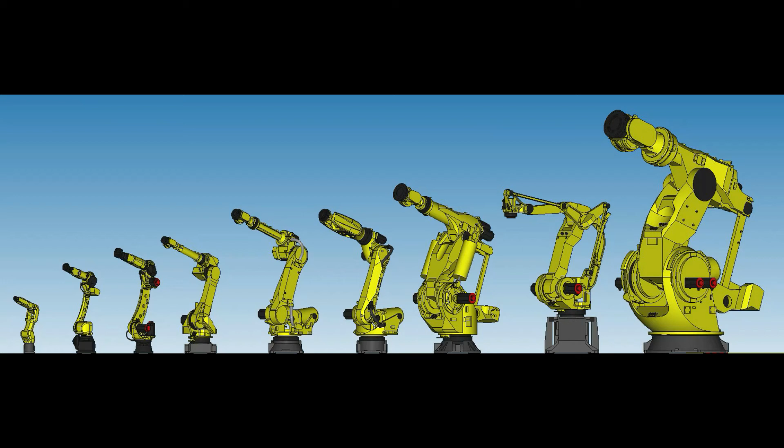This tutorial is an example of DCS setup for robots sharing a zone. Please follow the setup; you may need to pause the video to get the info.

Choose all DCS options except Safety PMC. Click Next button until you finish the wizard.

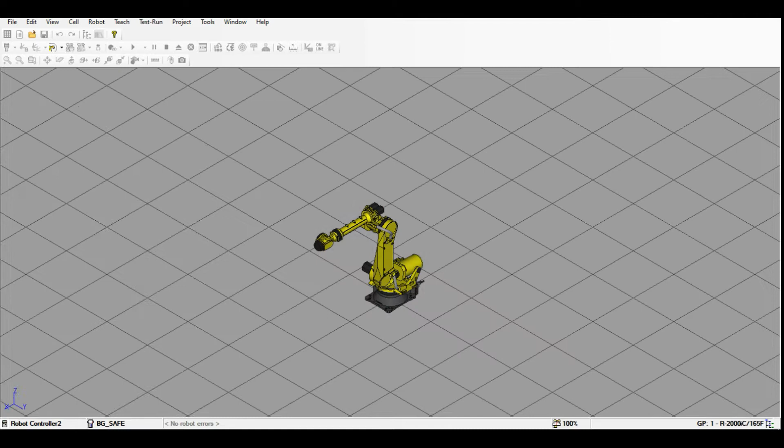Make the cell floor invisible and then use an obstacle box to create the new floor.

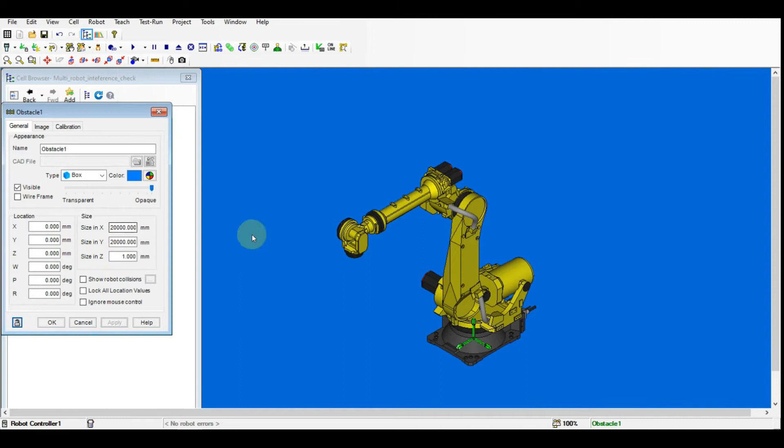Open robot properties and change the Z height. Add robot base with right-click at the Robot tab from the Cell menu, and then select Dressout.

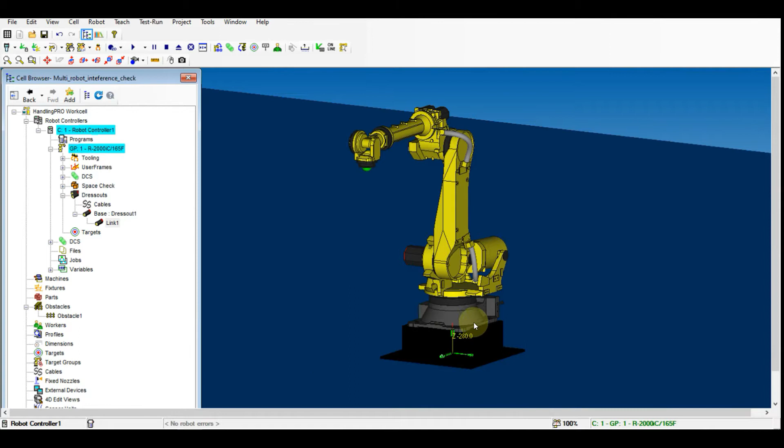Change the robot Y location to free up space for the second robot. Add gripper CAD to tool number 1 using the Roboguide CAD library.

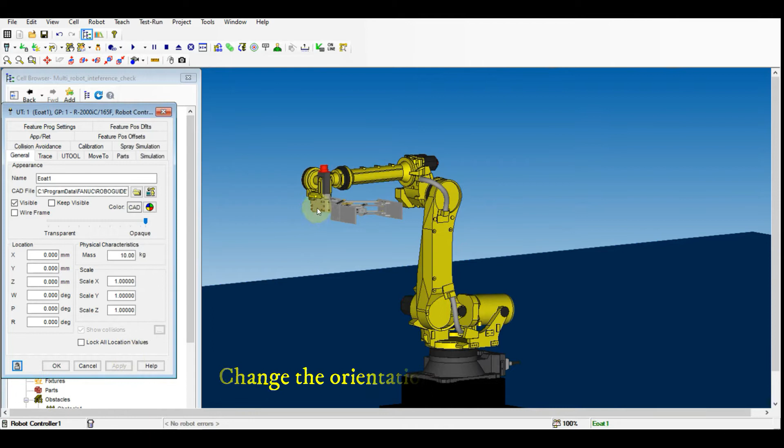Change the orientation of the gripper CAD. Remember to change the user tool coordinates.

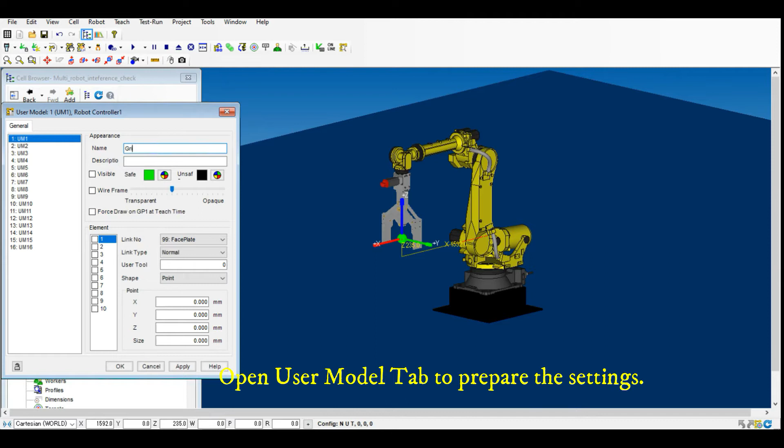Open the User Model tab to prepare the settings. Open DCS User Tool Frame to register the user tool for DCS.

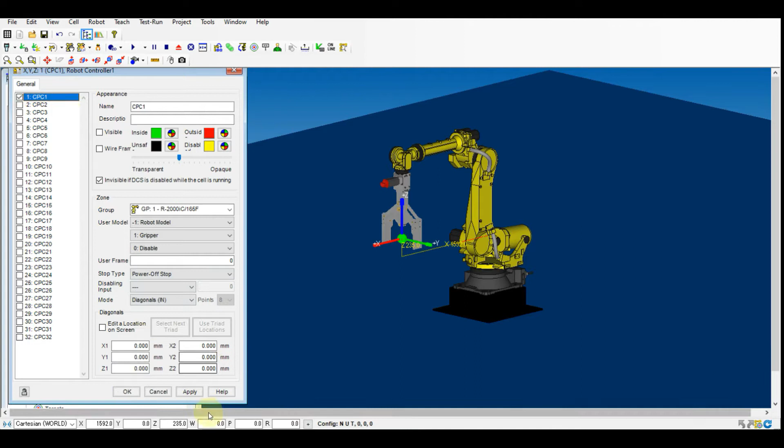Open DCS XYZ and do the settings as following. We need to assign the user model at one of the active Cartesian position checks to visualize the user model space.

Now back to the user model settings window. Set the zone accordingly.

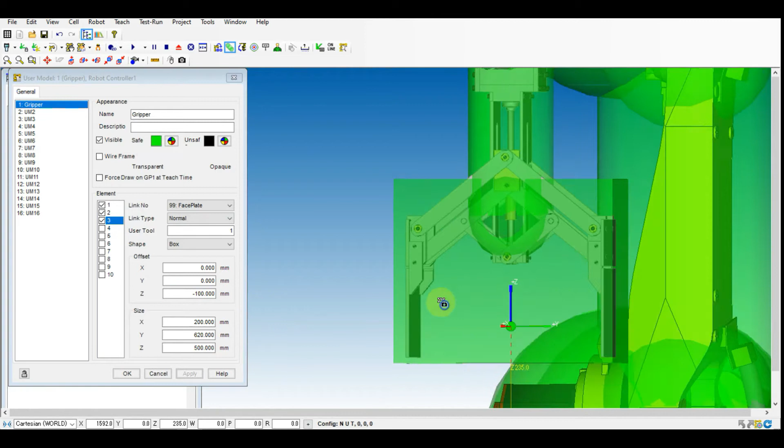Duplicate the robot now: right-click at the Robot Controller tab and add a robot with clone mode. Simply set the coordinate; we can still change it later.

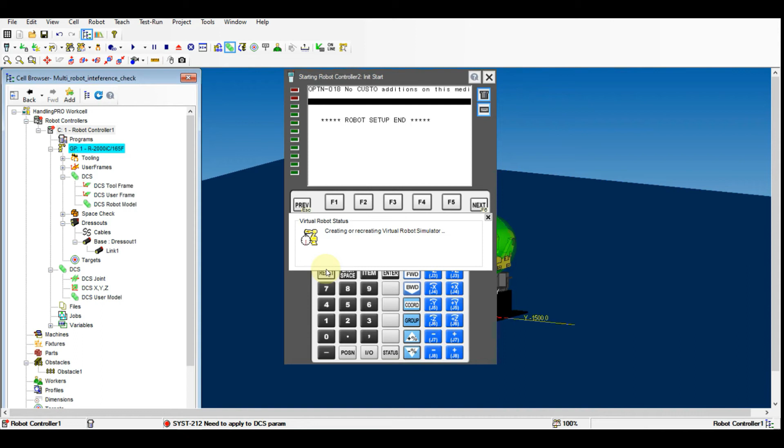Change the robot position now. Add a fixture like the sharing work zone of both robots.

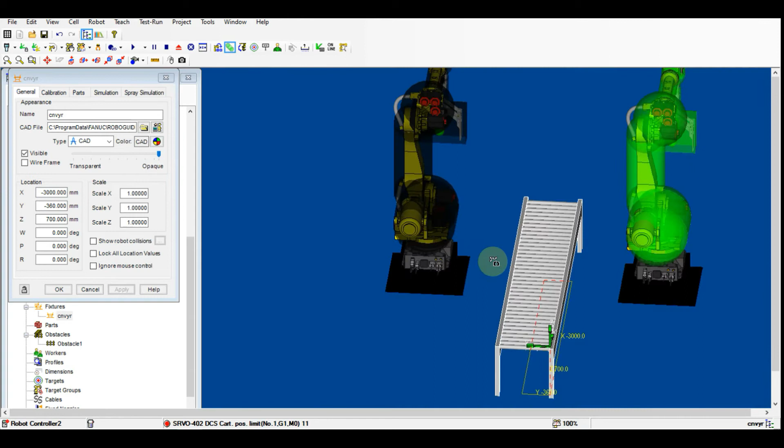If you want to put the conveyor in the center of both robots, measure the distance from the robot to the conveyor.

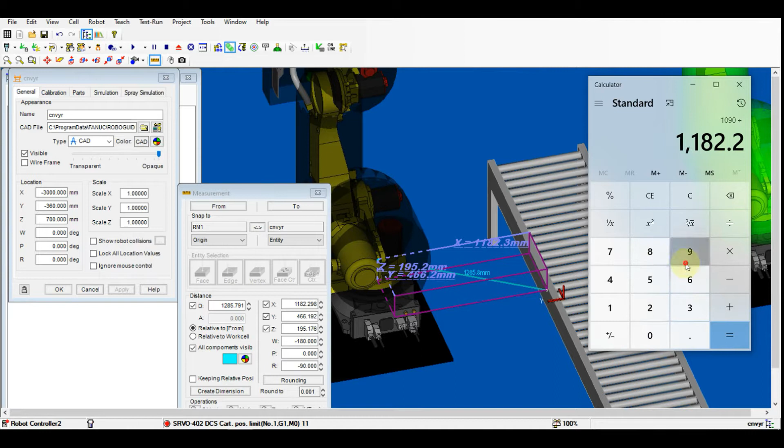Change the distance from the robot to the conveyor after calculating it, then reconfirm the position of robot to conveyor.

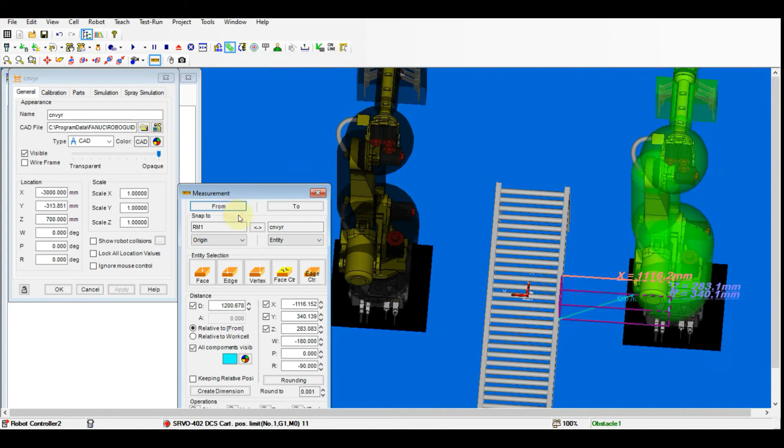Now open the setting window of DCS XYZ, and start setting up the safety zone of the robot.

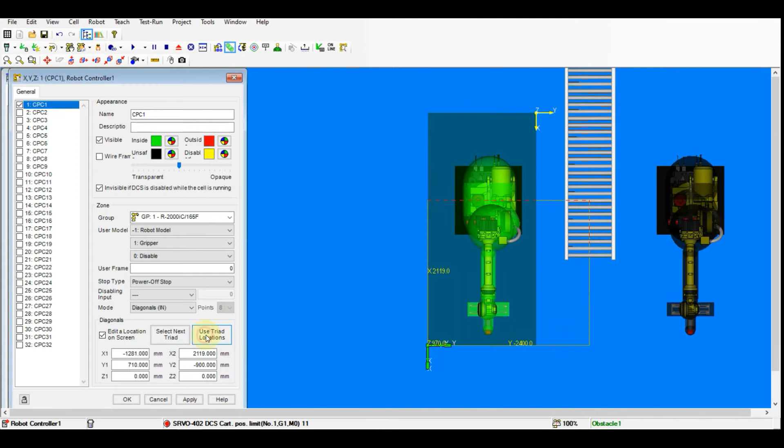Use edit location on screen, it makes the setup easy. Please make sure you click use triad locations before you click the next triad.

Round off the location value after that, and change the name for this zone.

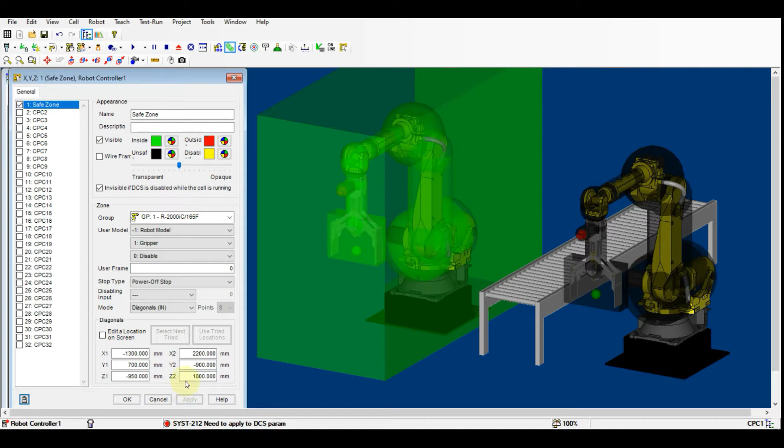Now it's turn to set robot 2. Apply the same setting as robot 1 and change only the location of the triad.

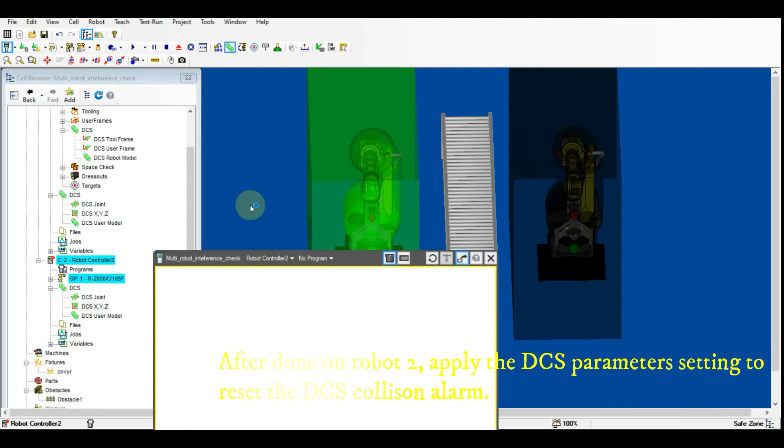After done on robot 2, apply the DCS parameters setting to reset the DCS collision alarm. Do the same thing to robot 1.

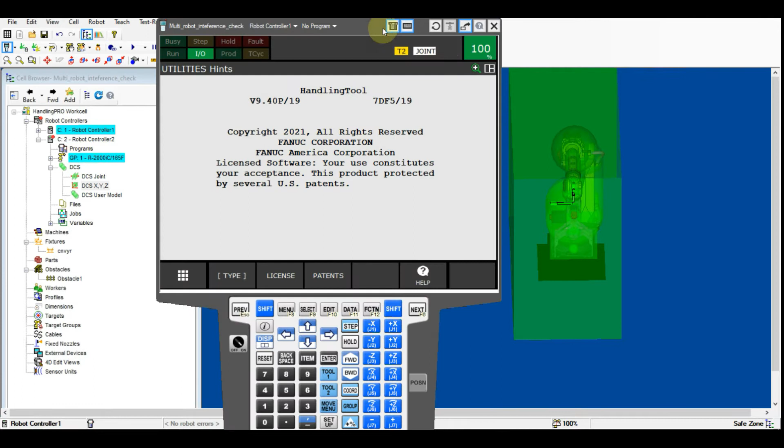Set up a working zone to prevent the robot from moving out to the another robot that stays in the safe zone.

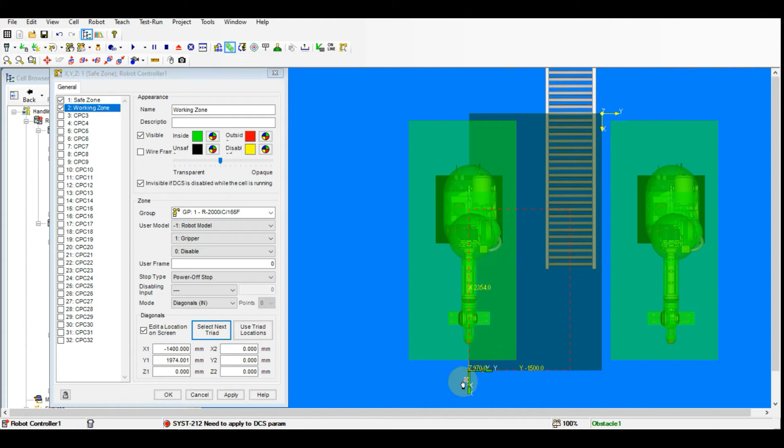Do the same setting on another robot 2.

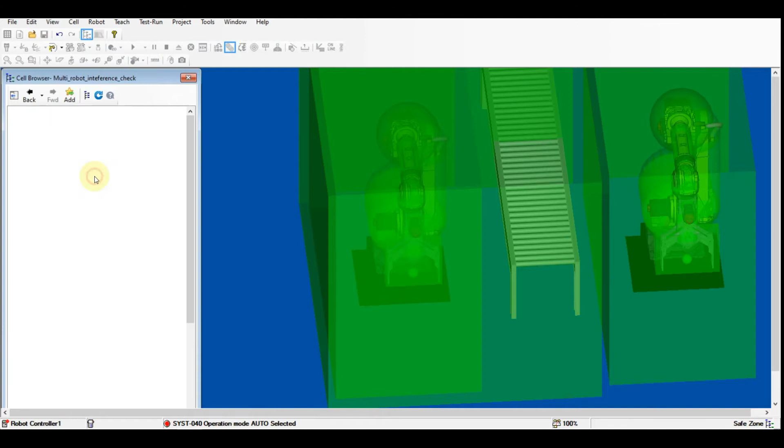Set up a restrict zone to prevent the robot from crashing into the conveyor.

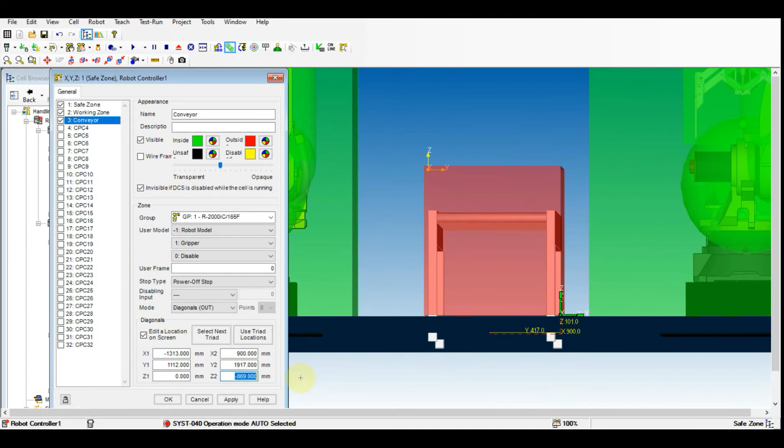Do the same setting to another robot.

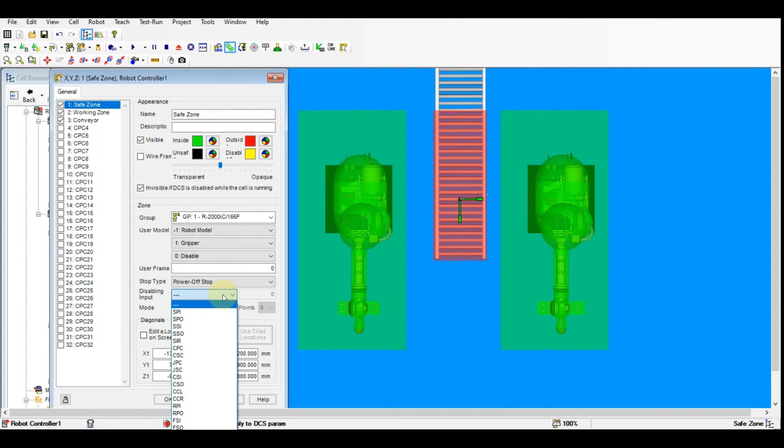Now we can set up the disabling input for the safe zone, using SIR, Safety Internal Relay, as the disabling input.

Turn on the Teach Pendant, and then open the DCS IO Connect screen.

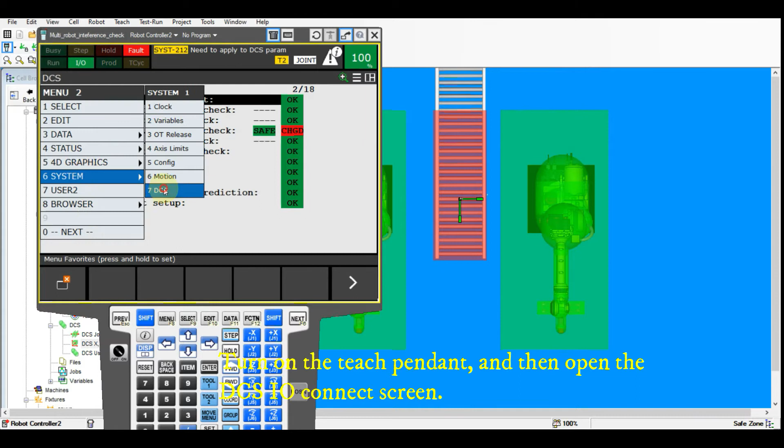Set up SIR1 to NSI1. Apply the setting and cycle power the controller.

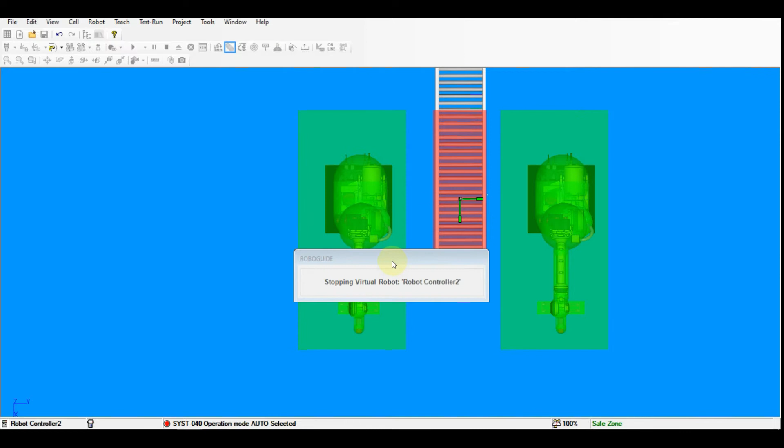Apply the same settings to another robot.

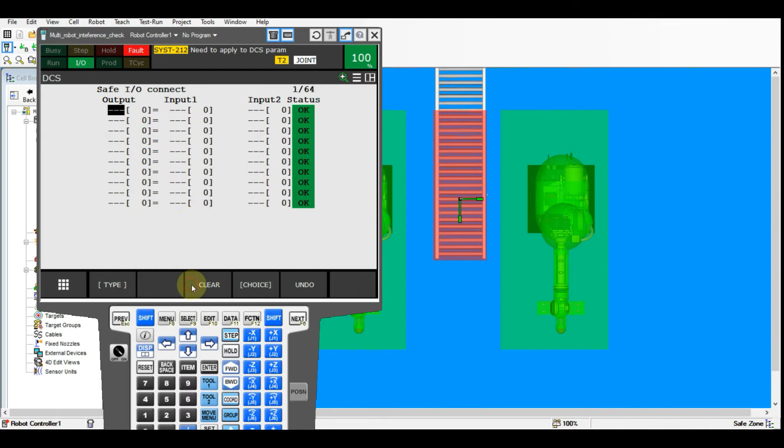Now, redo the I/O configuration of digital input and output.

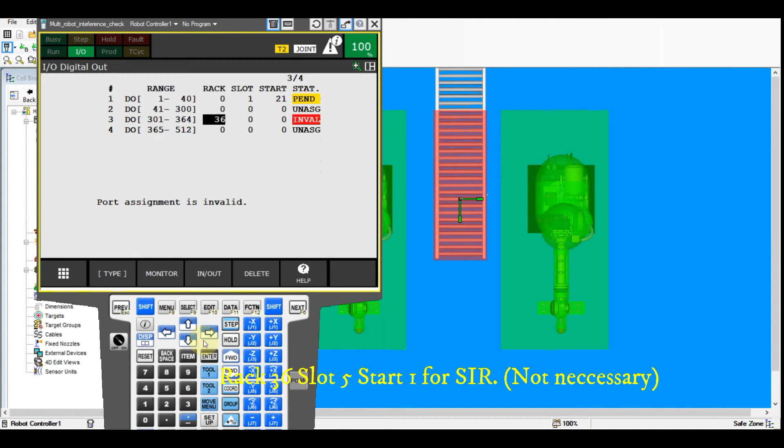Rack 36 slot 5 start 1 for SIR. You are not necessary to set this.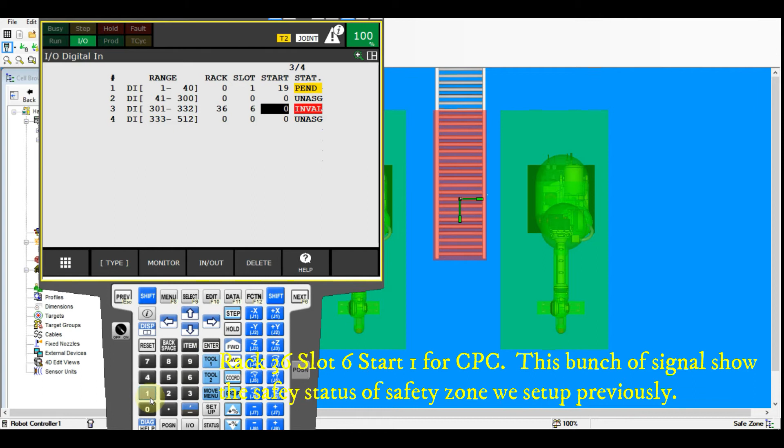Rack 36 slot 6 start 1 for CPC. This bunch of signals shows the safety status of the safety zone we set up previously.

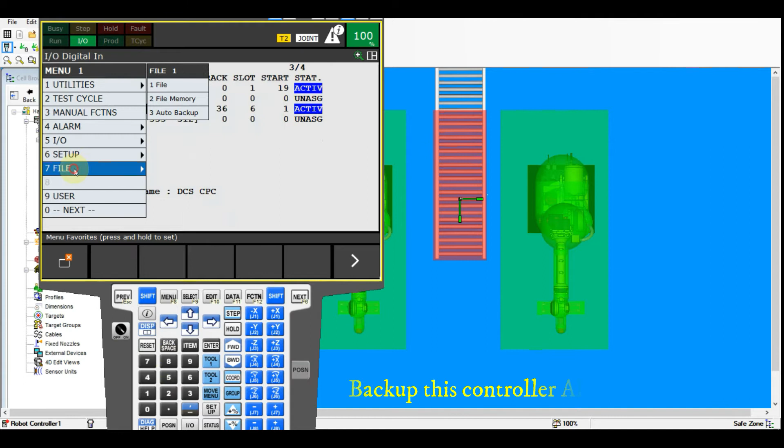Back up this controller, all of the above files. Open the work cell file, and look for the robot that was backed up just now.

Find and copy the file DIOCFGSV.IO. Then open Robot 2 file and paste it in UD1.

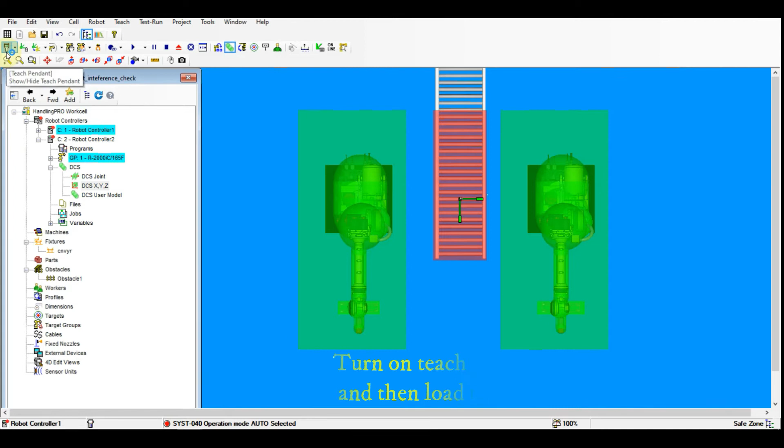Turn on the Teach Pendant of Robot 2 and then load the file from UD1.

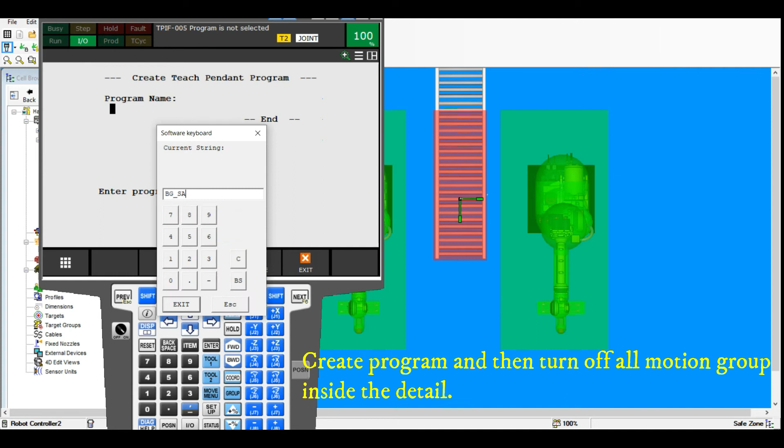Create a program and then turn off all motion groups inside the detail. Insert the program like above.

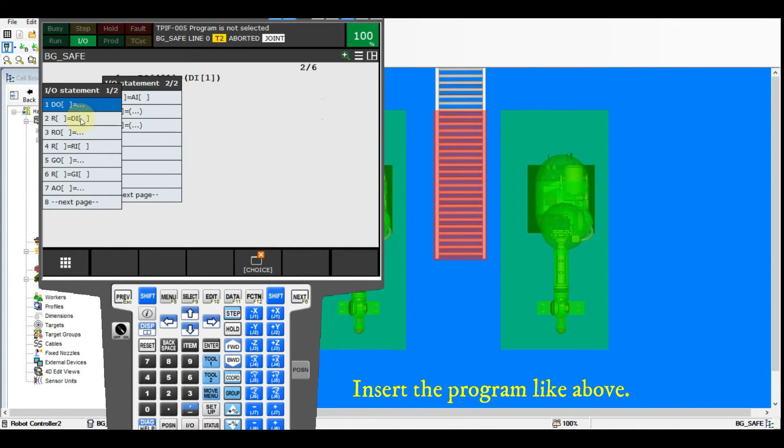Key in the name for the program-related I/O.

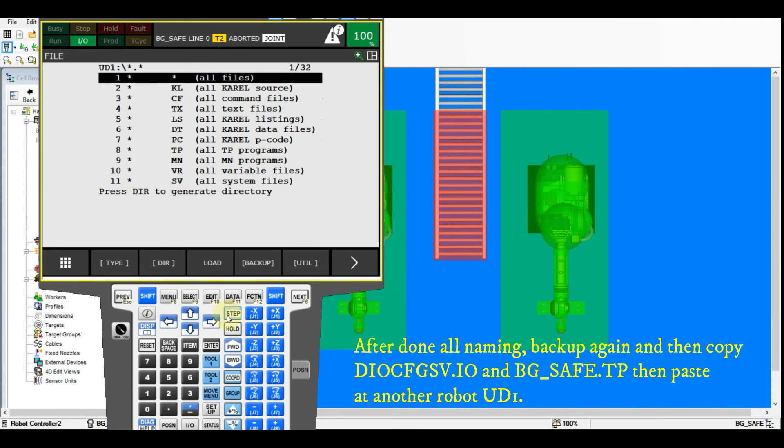After naming everything, back up again and then copy DIOCFGSV.IO and BG_SAFE.TP, then paste them at another robot's UD1.

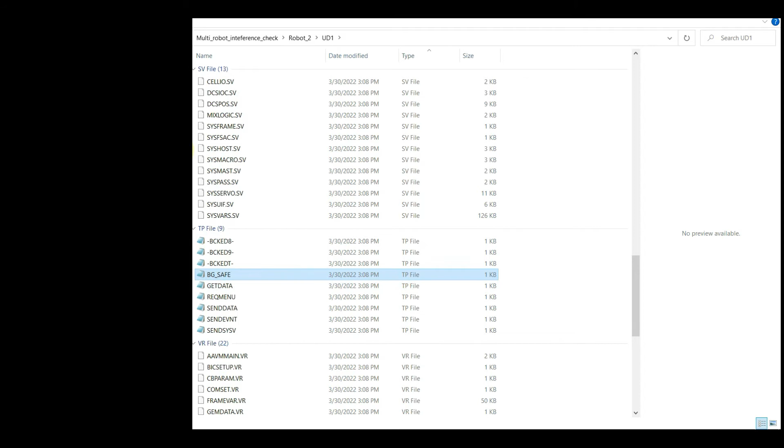Turn on the Teach Pendant and load the new files.

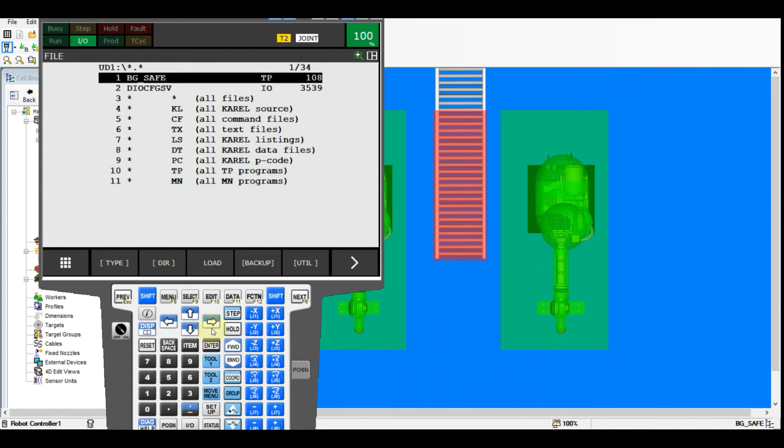After loading the files, press menu, go to Setup and then go to BG Logic. Choose the BG_safe program and run the program.

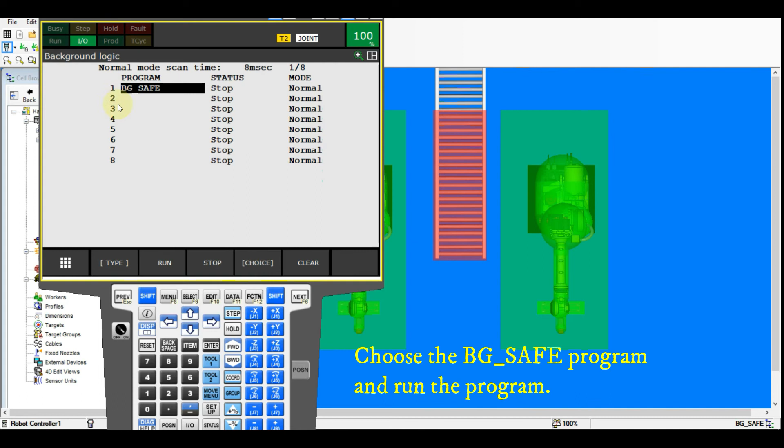Restart the controller due to the loaded DIOCFGSV.IO. Change to another controller to assign the BG_safe program.

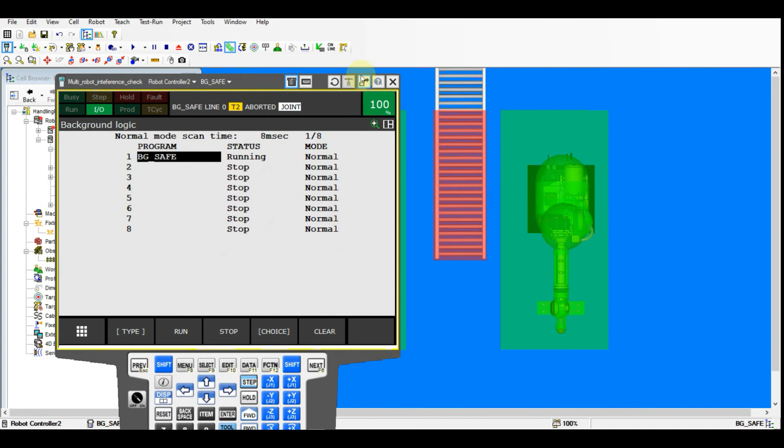Use the Tool menu from the top menu bar and then open the external I/O connection. Set up accordingly.

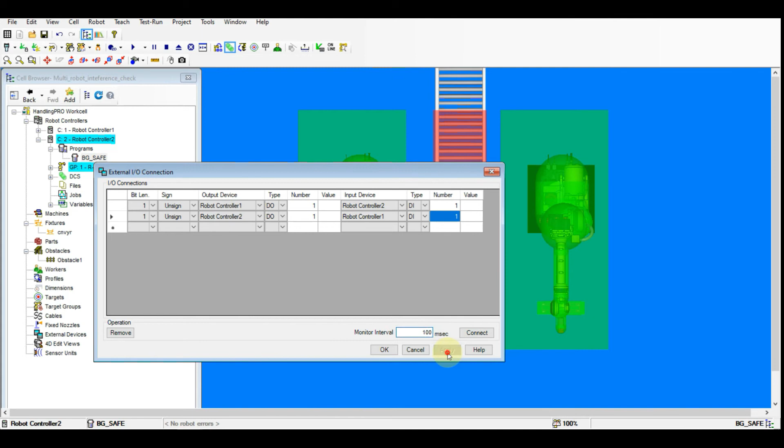Use the Tool menu from the top menu bar and then open the I/O panel utility. Set controller 1 and 2 with DI1 and DO1.

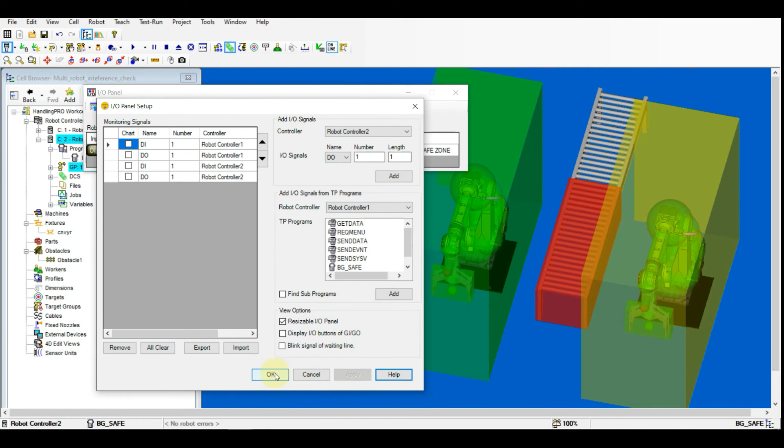We can change the I/O name from the panel directly.

Now try to move the robot that has the disabled zone. Switch to another and try to move.

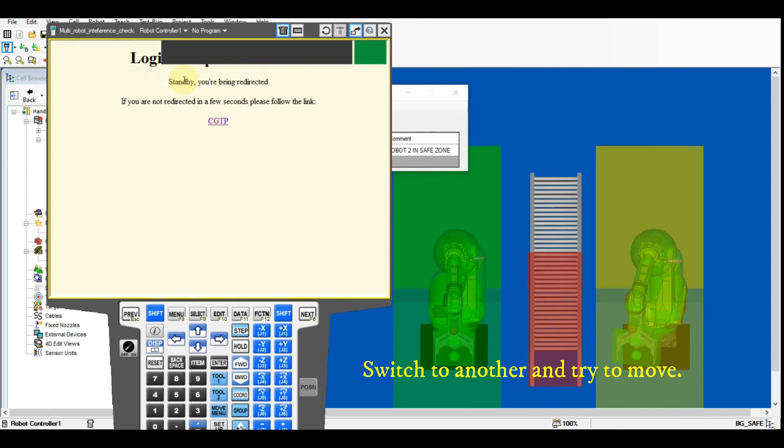Robot 1 has contacted the zone and stopped. Then only the zone turns to disable. This condition was not correct.

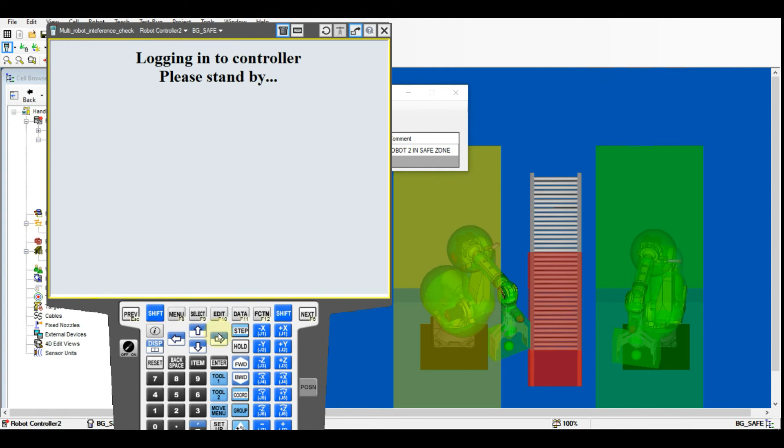We can correct it as follows. Open the DCS XYZ settings window, and add one more zone.

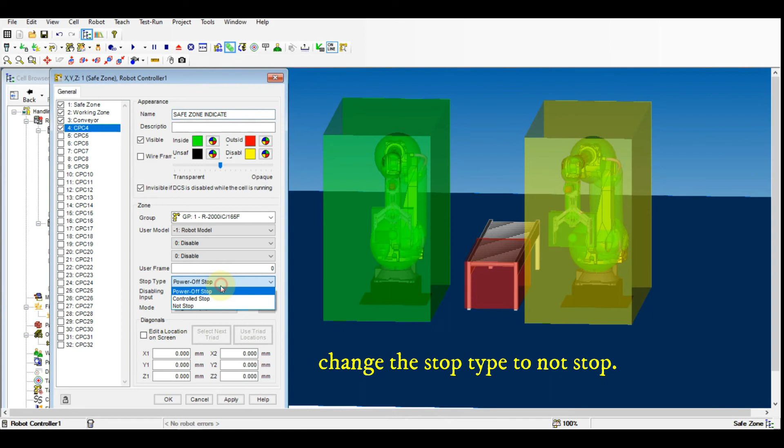Change the stop type to not stop. Set the same zone location as the safe zone.

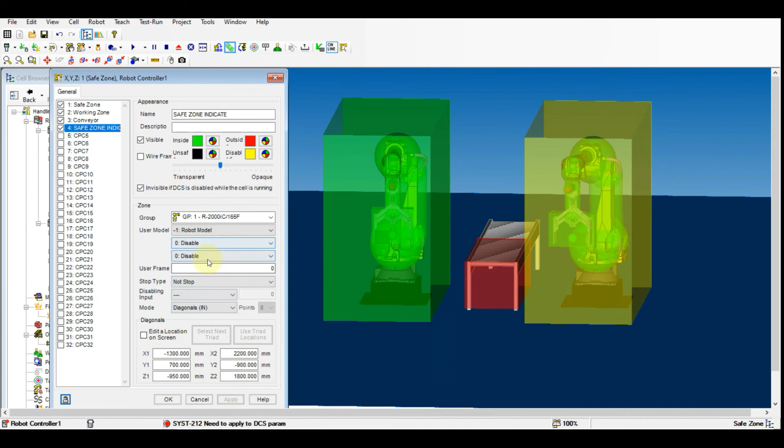Set the new zone for Robot 2 too.

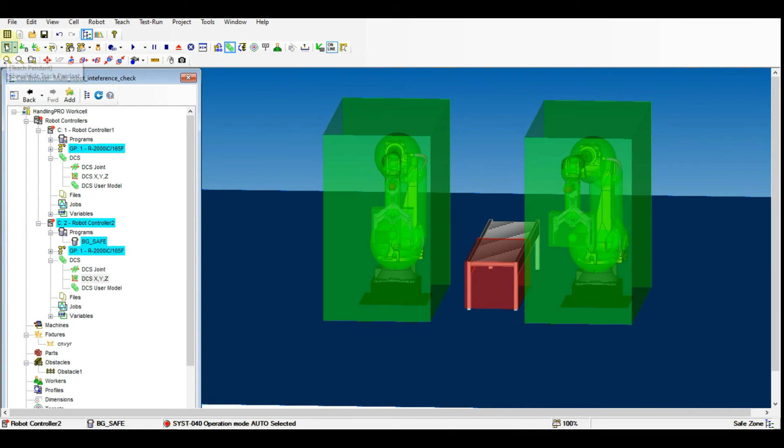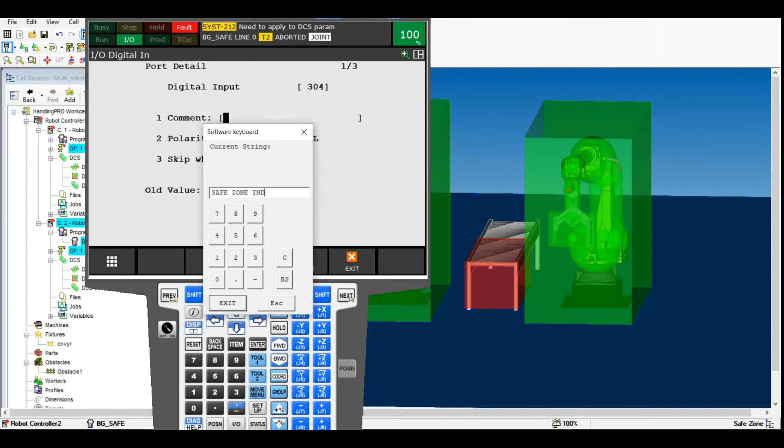Add a name to the CPC4 status IO. Don't forget to apply the DCS parameters again.

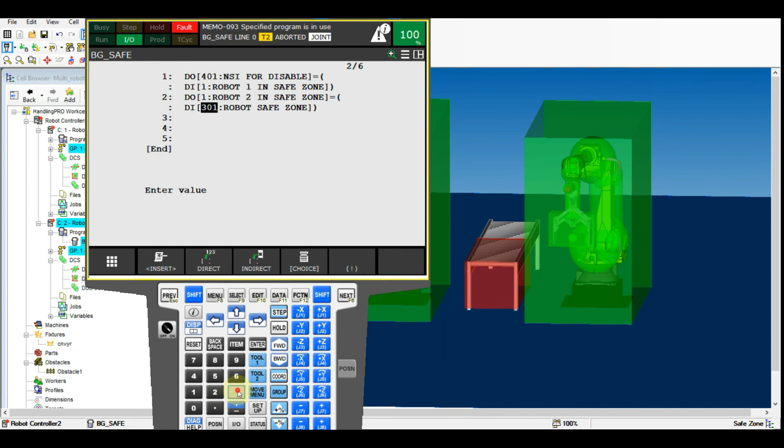Stop the BG logic as running, then open the BG_safe program and change DI 301 to DI 304. Set the BG logic to run again after the program is modified.

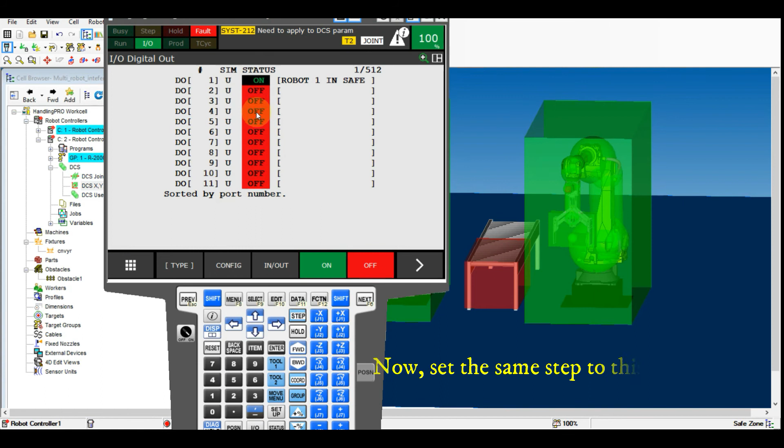Cycle power the controller now, then switch to another controller. Now set the same step to this controller.

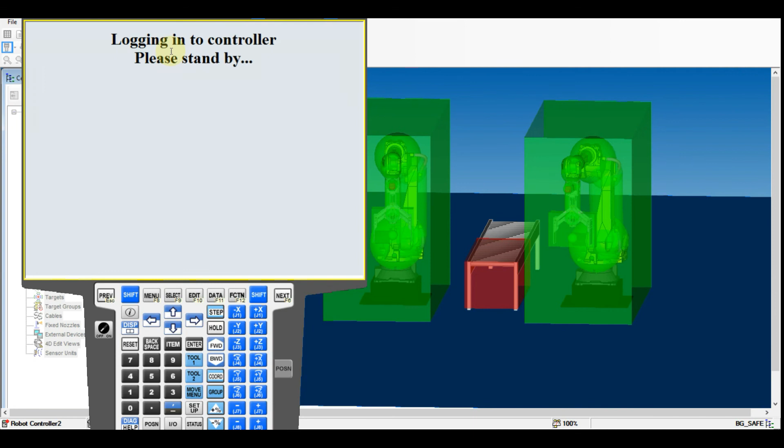Open the DCS X,Y,Z window and make the CPC4 become invisible. Do it for both controllers.

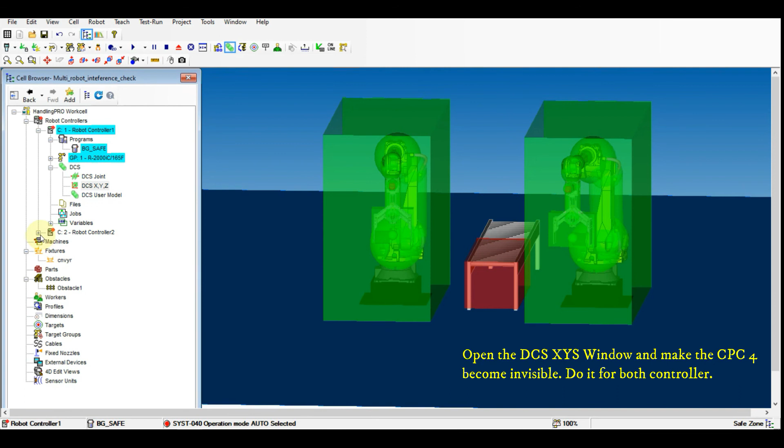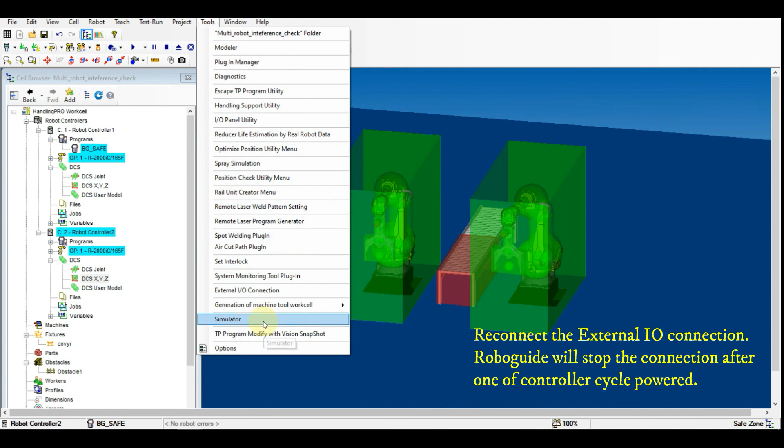Reconnect the external I/O connection. Roboguide will stop the connection after one of the controllers is cycle powered.

Now both robot DCS zones turn to disable status.

Try to jog one of the robots out from the zone. Another robot's zone immediately turns to enable.

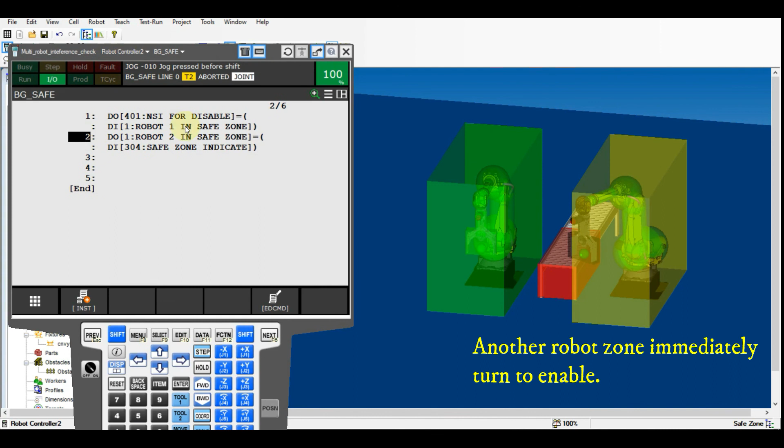Once you jog the enabled-zone robot to exit the zone, the whole system will stop with a DCS limit. Once the restricted movement robot jogs back to safety, the system automatically resumes to restriction status.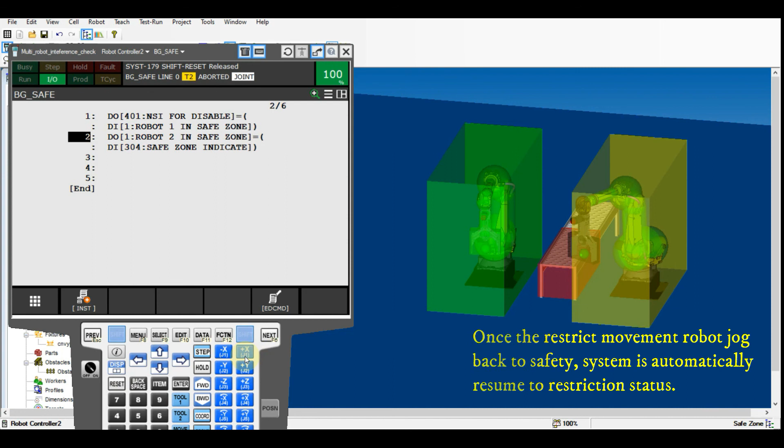Try to reconfirm with robot 2 in safety and robot 1 moving.

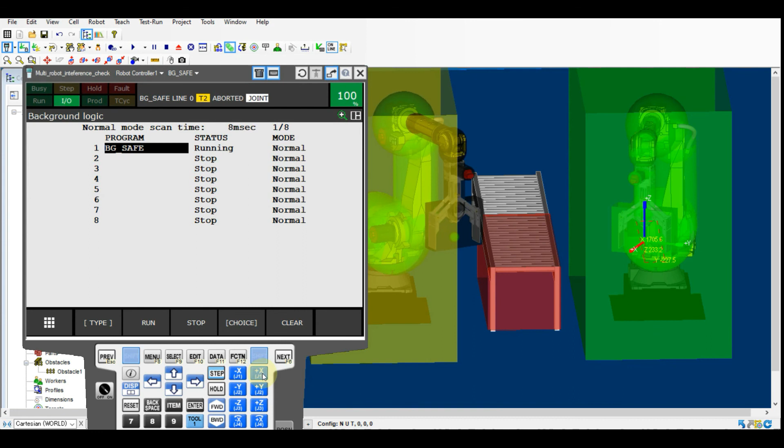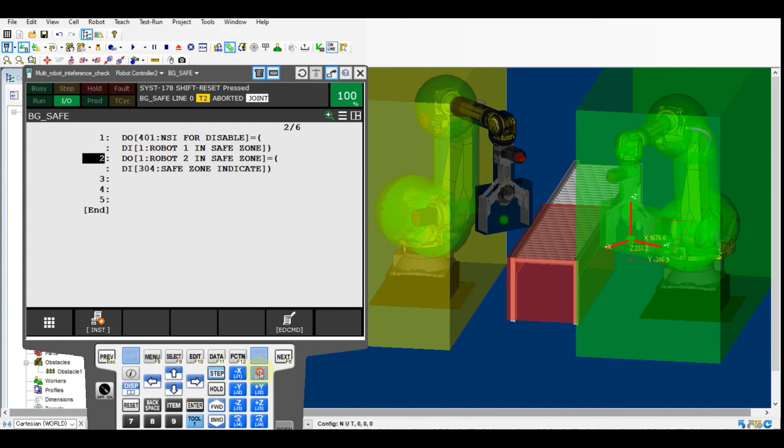Here we go, we have successfully set up the interference zone safety with DCS. The tutorial ends here. Thanks for watching, and see you next time.